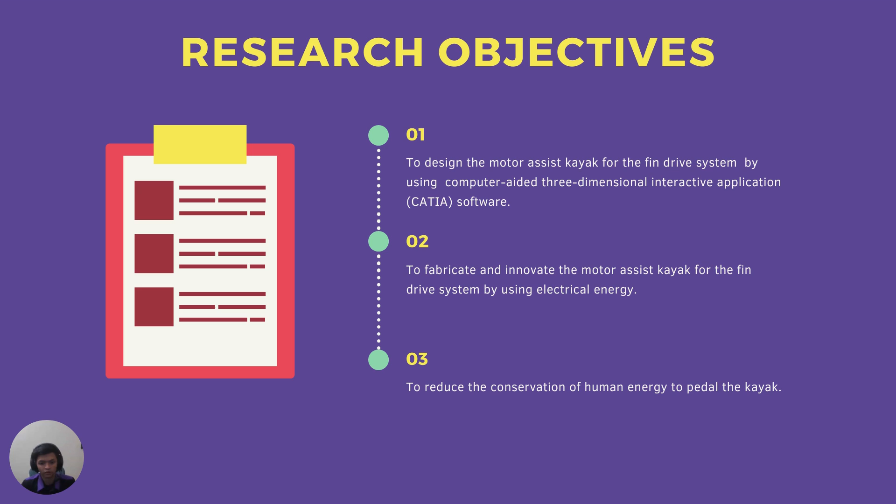Secondly, to fabricate and innovate the motor assist kayak for the fin drive system by using electrical energy. And the last one is to reduce the conservation of human energy to pedal the kayak.

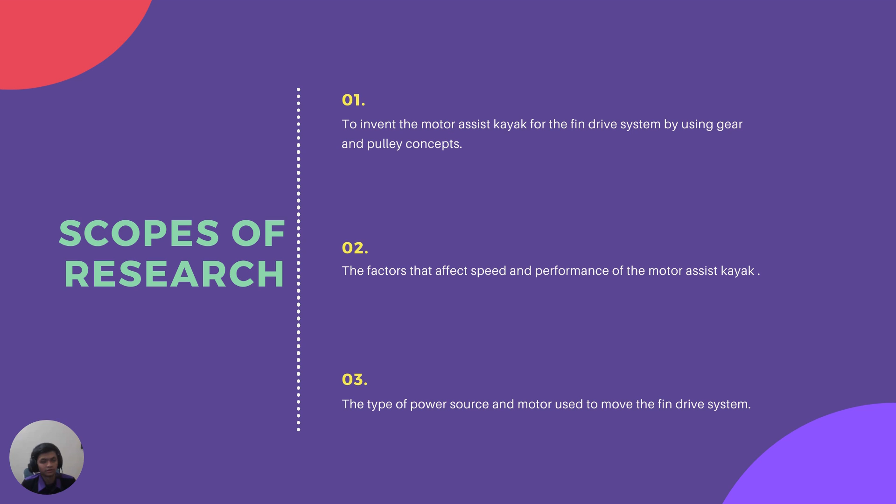Next, scopes of research. The scopes of research are as follows. First one is to invent the motor assist kayak for the fin drive system by using gear and pulley concepts. Second one, the factors that affect speed and performance of the motor assist kayak. And the last one is the type of power source and motor used to move the fin drive system.

Next, literature review based on previous related work. So, we start with the evolution of kayak. In the 1800s, kayak was first introduced in Europe. One of these designs was a revolutionary collapsible kayak model called a fold boat, which was invented in Germany in the 1800s. The fold boat was designed to be dismantled and transported in just 2 suitcases.

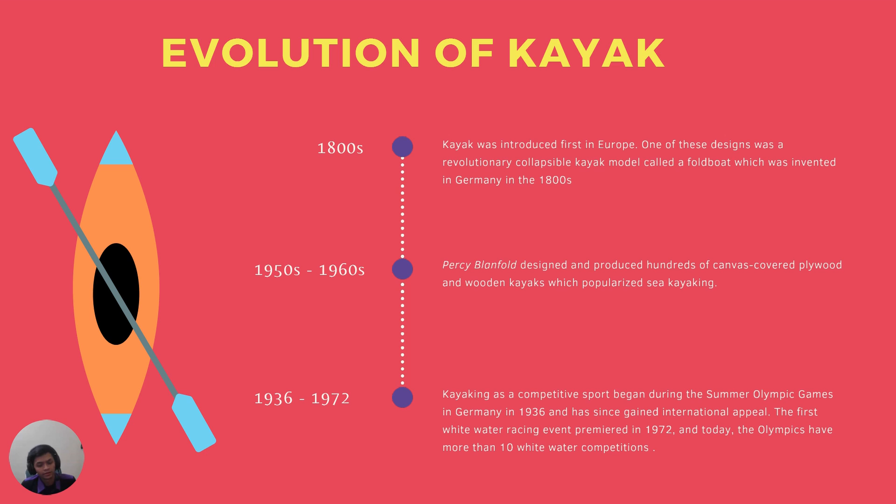Next, in the 1950s and 1960s, Percy Blandford designed and produced hundreds of canvas-covered plywood and wooden kayaks, which popularized sea kayaking. Next, 1936 and 1972, kayaking as a competitive sport began during the Summer Olympic Games in Germany in 1936 and has since gained international appeal. The first whitewater racing event premiered in 1972, and today the Olympics have more than 10 whitewater competitions.

Next, the existing types of kayak propulsion. So basically there are three types of kayak propulsion. The first one is paddle kayak. The paddle is held with two hands, some distance apart from each other. For normal use, it is drawn through the water from front, which is the bow, to back, which is the stern, to drive the boat forwards. And the two blades of a kayak paddle are dipped alternately on either side of the kayak.

Next, pedal fin drive. A Mirage drive is a pedal-powered device that uses two identical fins that move forward, backward, and sideways to make the kayak move. On the water, speed and efficiency are the advantages of pedaling.

Next, pedal propeller drive. A propel drive is used to propel a propeller-based pedal kayak forward or backward. Native Watercraft first introduced the propel drive-based pedal kayak in 2008. The difference between a propel drive and a Mirage drive is the propel drive consists of rotational pedals that work with a rotating propeller rather than the push pedals of the Mirage drive.

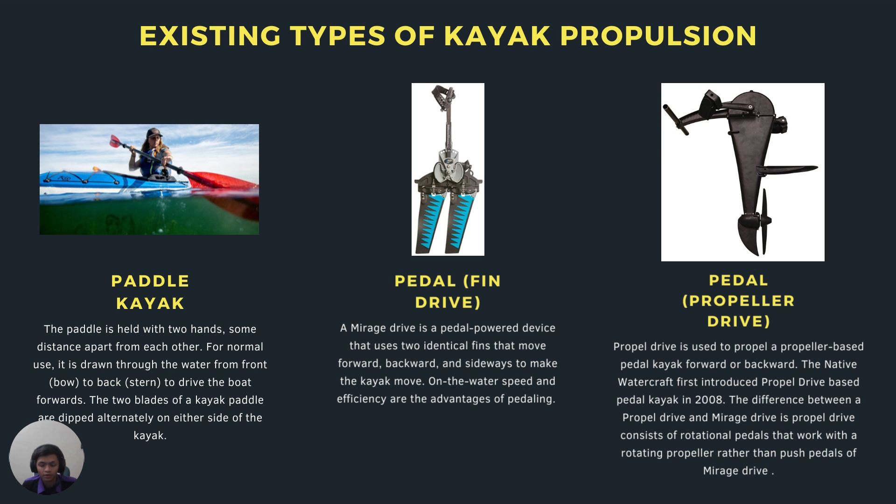Because the propeller is located beneath the kayak, the operational method is simple in this case. When the pedal is rotated, the propeller rotates as well, and the kayak moves as the propeller turns.

Next, the introduction to quick return mechanism. So, a quick return mechanism is a system that creates a reciprocating effect by taking less time in the return stroke than it does in the forward stroke. The working and return stroke of quick return systems have differing input durations.

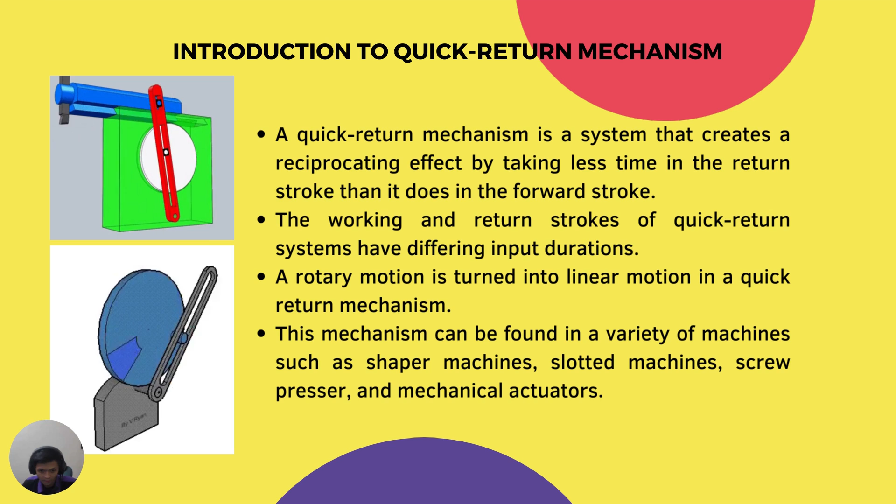A quick return mechanism's time ratio is the ratio of the input displacement change during the working stroke to the change during the return stroke. A rotary motion is turned into linear motion in a quick return mechanism, like a crank or lever mechanism. However, the return stroke is different from the forward stroke duration. The time duration is different between the forward stroke and the return stroke. So this mechanism can be found in various machines such as shaper machines, slotted machines, screw presses, and mechanical actuators.

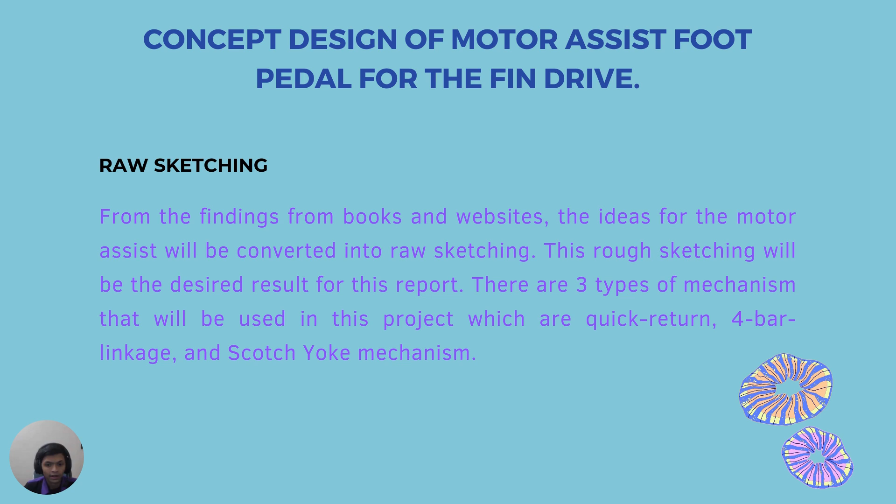Next, for the concept design of the motor assist foot pedal for the fin drive, basically there are three types of mechanism that will be used in this project, which are quick return, 4-bar linkage, and scotch yoke mechanism. The ideas for motor assist will be converted into raw sketching.

So the first one, design A. Design A uses a single sprocket which is directly connected to the starter motor. This design uses a single metal bar that is connected between the sprocket and the pedal. A short bar will be welded to the sprocket here to make an offset. So basically, when the sprocket rotates a full 360 degrees, the pedal will rotate in a limited range between 0 and less than 180 degrees.

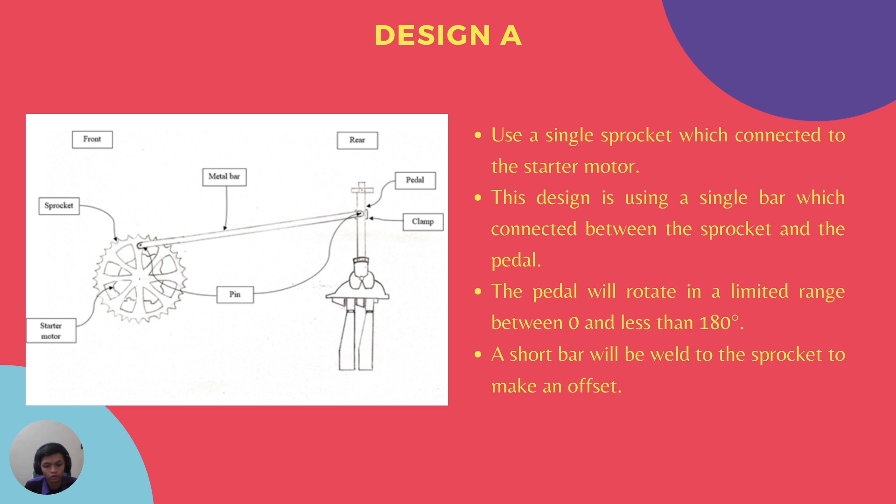The motor used is smaller, making the bar that connects the sprocket and the pedal not linear. So a short bar will be welded to the sprocket to make an offset.

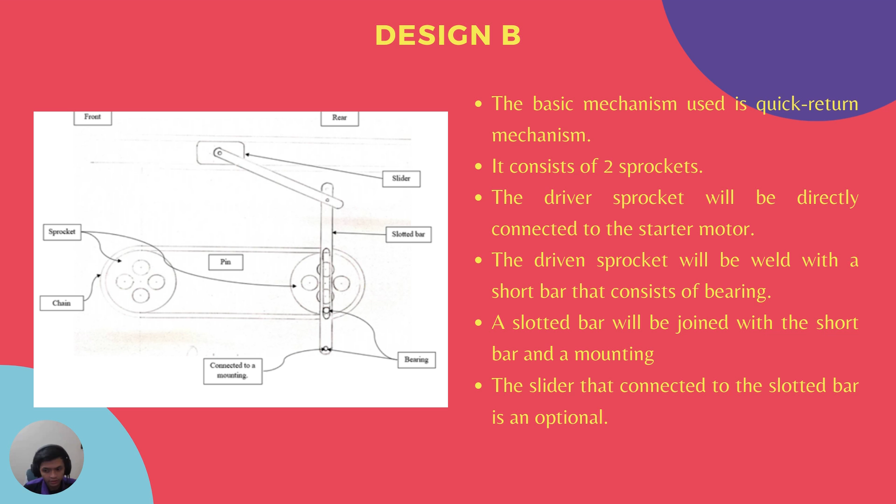Next, for design B, the primary mechanism used is the quick return mechanism, which consists of two sprockets, a driver sprocket and a driven sprocket. The driver sprocket will be directly connected to the starter motor. However, the driven sprocket will be welded with a short bar that consists of a bearing. Then a slotted bar will be joined with the short bar here, and a mounting after applying some grease to the bearing. Next, the slider is connected to the slotted bar here, and the slider is optional. Without the slider, the system can function perfectly as well.

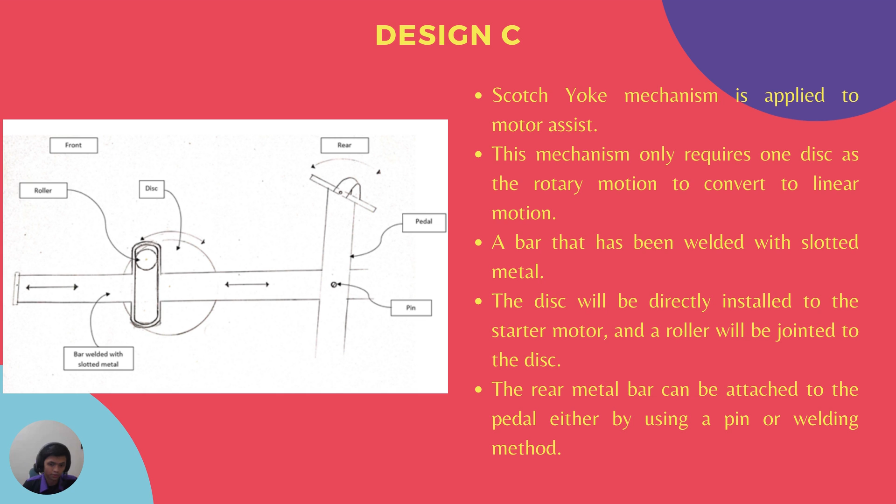And the last one is design C. Design C uses a Scotch yoke mechanism. This mechanism only requires one disc for the rotary motion, to convert rotary motion to linear motion. A bar has been welded to the slotted metal, the disc will be directly installed to the starter motor, and a roller will be joined to the disc here. And the rear metal bar can be attached to the pedal here, either by using a pin or welding method.

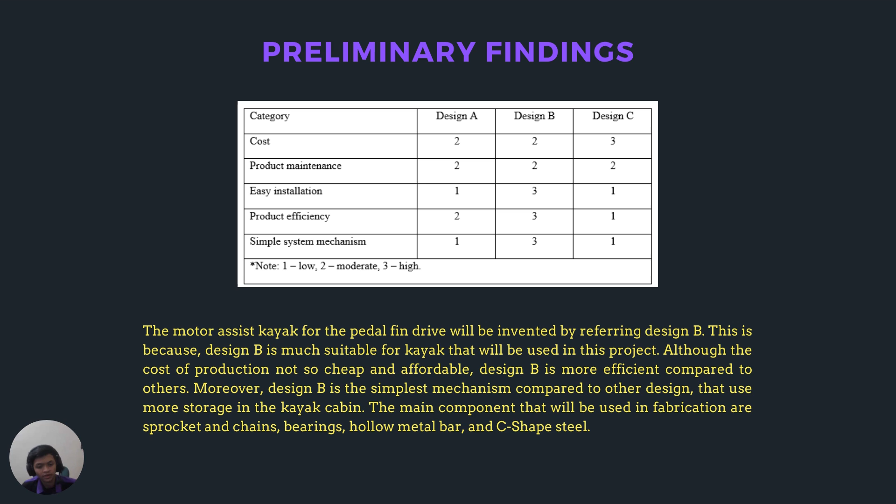And as for the conclusion, this project will produce a motor assist kayak foot pedal fin drive system that will minimize the energy consumption of kayak users. Moreover, this project is to fulfill the objective requirements and solve the problem statement of this project.